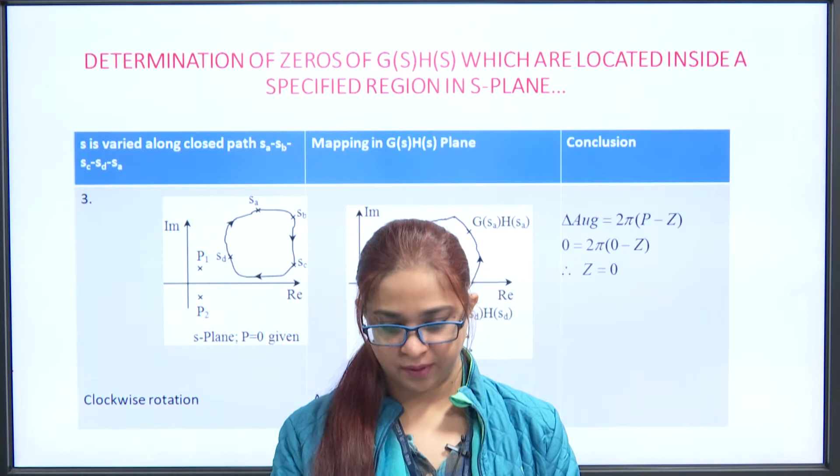Today we will continue this lecture in continuation with the previous lecture where we studied about Nyquist stability criteria. So let's begin with this today's lecture. But before beginning, let me recapitulate what we did in the previous lecture. We were talking about what Nyquist stability criteria says and how we are going to analyze stability and how we can determine other things like frequency response parameters in this frequency domain using this Nyquist criteria.

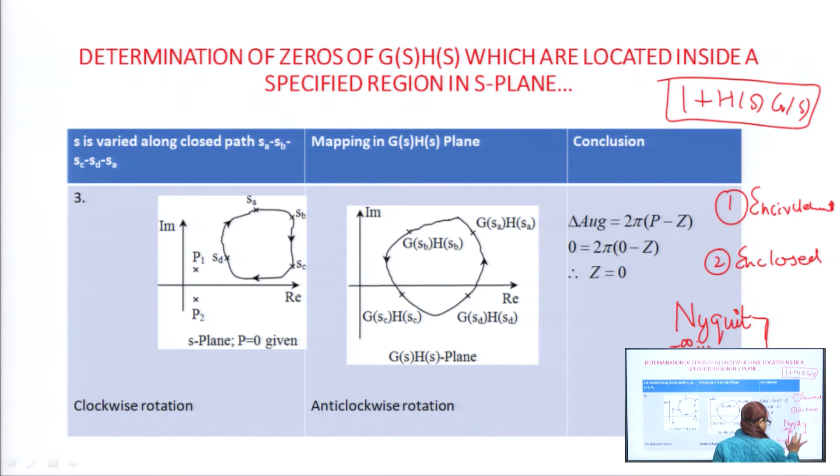This Nyquist curve says that we have one segment which is varying from minus infinity to plus infinity in j omega axis, and then we are taking a semicircle of radius r in the format r e to the power j theta, where r is tending to infinity. So this is our Nyquist contour.

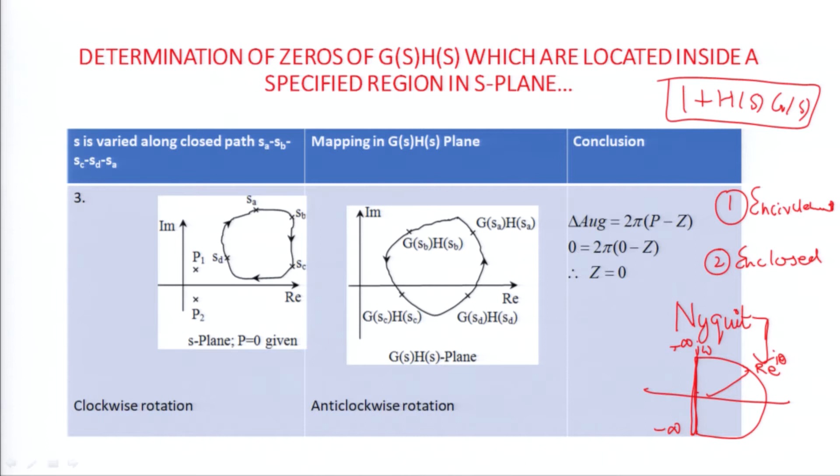Now what are we basically doing with this shape? We have two segments in this shape. First segment is this one which is the entire j omega axis. And the second part of the graph - what is it doing? It is enclosing the entire right half of S plane.

So here we discussed that there is a thing called theory of mapping, where we map a point in one plane to a point in another plane. So basically what we do here is first we map the curve of HSGS. How do we map it? Just like we learned in polar plot - let me remind you how we do it. We substitute S is equal to j omega, right?

We determine the values of magnitude as well as angle at omega equal to 0, at omega equal to infinity, at the intercept which it is making with the help of the real axis, and the intercept which it is making on the imaginary axis. With these 4 points when we join together, we used to get the polar plot. With the help of these 4 points we used to draw the polar plot. Nyquist is nothing but an extension of polar plot.

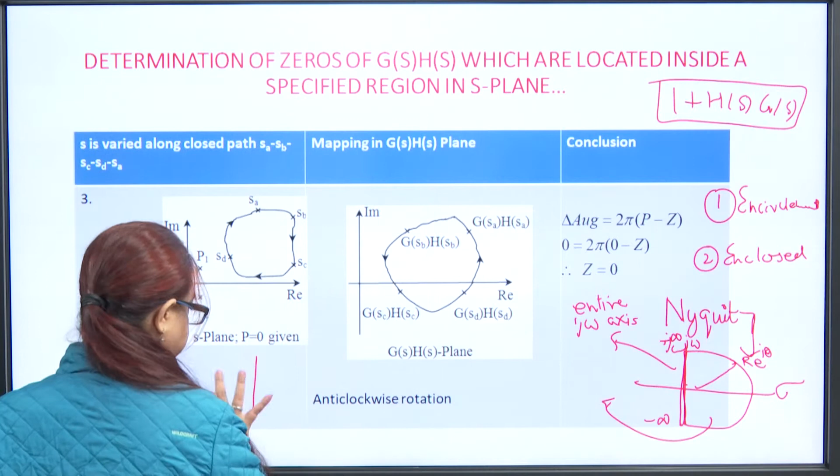So once we have drawn a graph on the S plane which is real and imaginary axis - see, this is real axis and imaginary axis, we are drawing it on real and imaginary axis - now what do we do? We transfer this into another graph with another plane. So let us suppose it is U and JV. And how do we get this U and JV? So what do we do actually?

In this characteristic equation, the term H(S)G(S), basically what we do is substitute S equal to any point S1, and then after substituting, we determine the corresponding value of point in the other plane. Suppose we have a system which is S plus 2.

Now what do we do? We substitute S with any arbitrary complex number, let's say 3 plus 2j. So it becomes 3 plus 2j plus 2, which becomes 5 plus 2j. So the new point corresponding to S plus 2 in the other plane, where we have 3 plus 2j, is 5 plus 2j. Similarly we plot all these points into another plane.

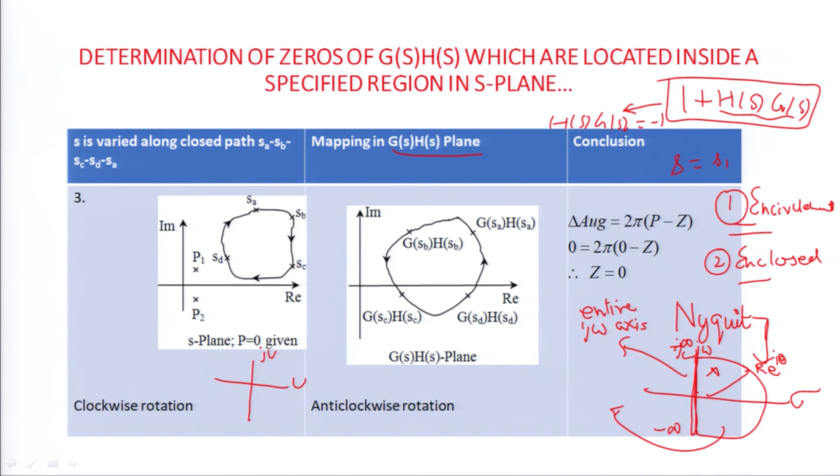the critical point we obtain is H(S)G(S) equal to -1. And for -1 we can write it as -1 plus j0. So rather than checking the encirclement at origin, we check the encirclement at the critical point, which is -1 plus j0, whether it is enclosed or not enclosed.

If it is enclosed, whether the enclosement is in counterclockwise direction or clockwise direction, and the number of encirclements, whether it is being encircled once, twice, or not encircled at all — these are the things we focus on.

Now let us suppose there is a zero of the system located inside this plane, that means it is enclosed in the curve. So what is the curve we get, how do we plot it in both the planes, and what is the conclusion drawn hence? Let's see.

When a pole is being encircled, we have already discussed this in the previous lecture. When nothing is encircled, neither pole nor zero, that case we have also discussed. So let's finally discuss the case when a zero is encircled in it. So basically what happens is

we have a system function where S is varying in a closed path as shown in figure number 3. We have certain specific marked points in this curve, indicated by SA, SB, SC, SD. In this system, all our poles are lying outside this curve. In this example, there are two poles P1 and P2, and both are lying outside. Nothing is being encircled or enclosed in this curve.

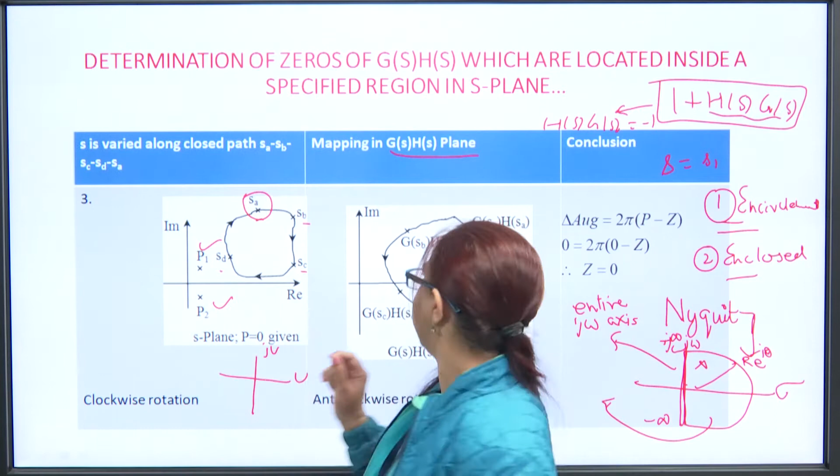When we substituted S equal to SA in the value of H(S)G(S), what do we get? We get a point corresponding to SA in the H(S)G(S) plane, which let's suppose is denoted here.

Similarly, what do we do again? We take the other point SB. See, this curve is having a direction of clockwise rotation, and it is true that it will be clockwise rotation only. Why? We have seen that in the previous lecture.

What about this SB? If we substitute this SB in S here, we will again get a point corresponding to this SB in the HSGS plane. Let's suppose it is G of SB into H of SB. Please pay attention: here we are moving clockwise. When we are moving from SA towards SB in clockwise direction, in the mapping of this function in the HSGS plane, we see that when we are moving from SA to SB, we are moving in the anti-clockwise direction.

This will automatically come. We don't have to put extra effort to determine it; it will always automatically come out this way only. Now the third thing is SC.

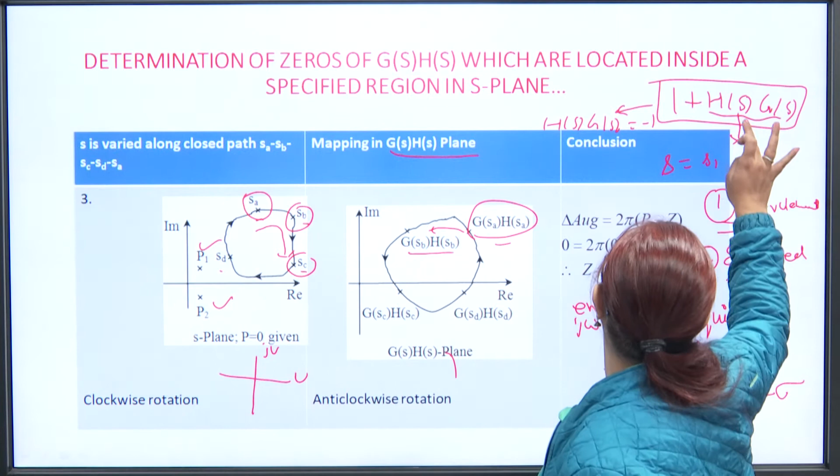Let us map this third point too, to see whether the entire structure gives us anti-clockwise corresponding to clockwise. When we substitute this point SC in the function, from S is equal to SC, we will get a point corresponding to SC in the HSGS plane. Let us mark it as G of SC into H of SC. Again see, the pattern continues.

From SB to SC we are moving in clockwise direction, so in the corresponding HSGS plane, when we move from SB to SC, it is anti-clockwise direction. As we move in clockwise direction towards points in the main S plane, in the HSGS plane the sequence of points moves oppositely. So if the S plane takes clockwise movement, the HSGS plane takes anti-clockwise movement. The opposite of this happens in the encirclement of poles. This is encirclement of zero we are talking about.

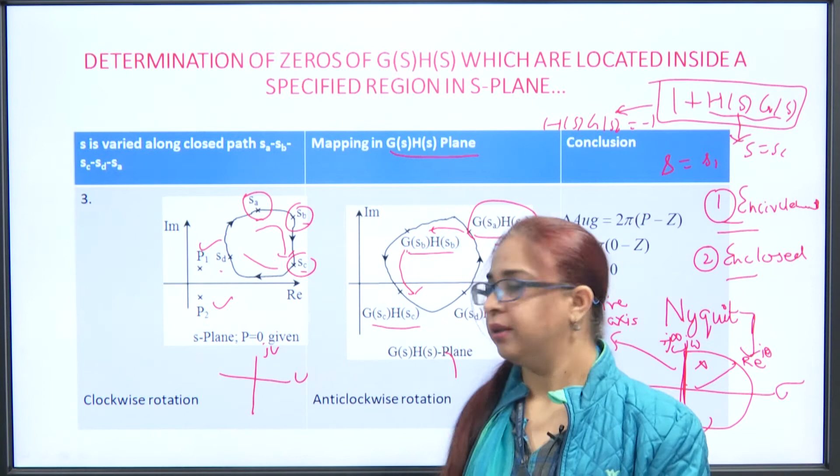Now let's move on to the last referred point, which we have marked as SD. Again we will substitute this value of SD in HSGS, and we will get a corresponding point. This is the corresponding point. See what is happening: it is taking a direction counterclockwise.

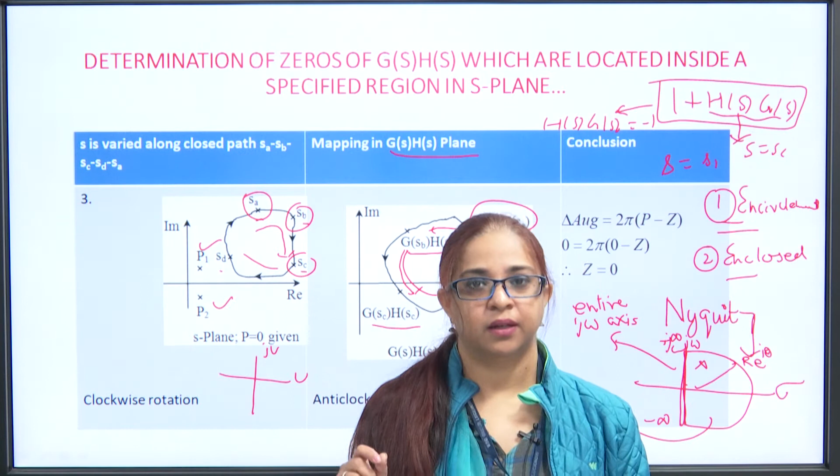Now we know that for a pole or a zero, we get a phase shift of 2 pi when it is enclosed, either in clockwise direction or anti-clockwise direction. If there is more than one encirclement, then the phase shift is 2 pi times P minus Z. This is what Cauchy's principle of argument theory has told us. That is why here it is 2 pi P minus Z.

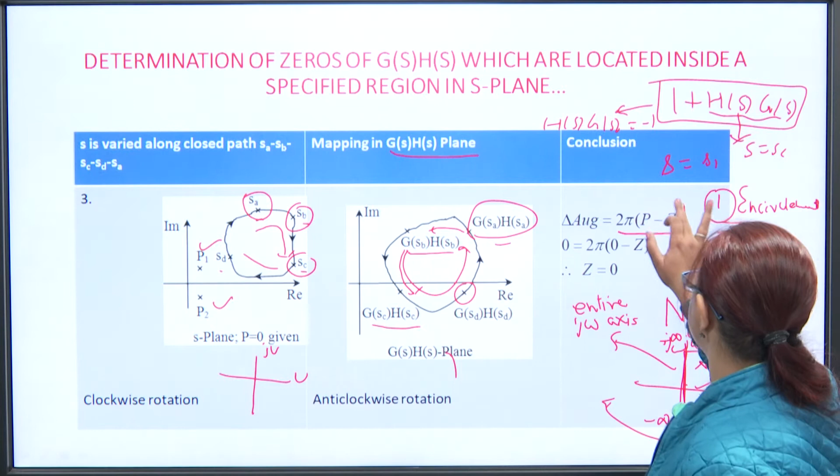According to the number of encirclements, we can also determine how many zeros or how many poles additionally are inside, which is encircled by the main plot. This is what the entire concept is all about.

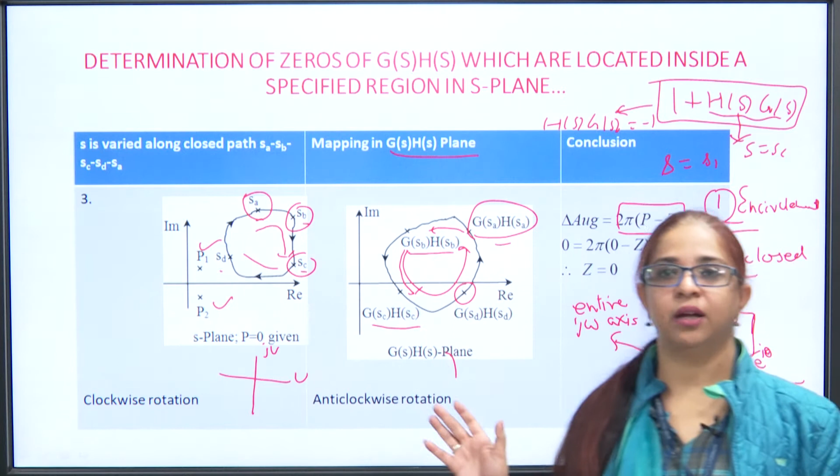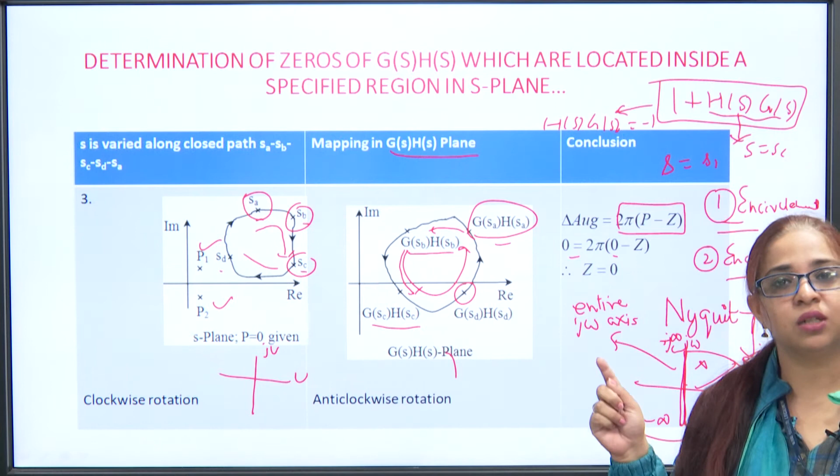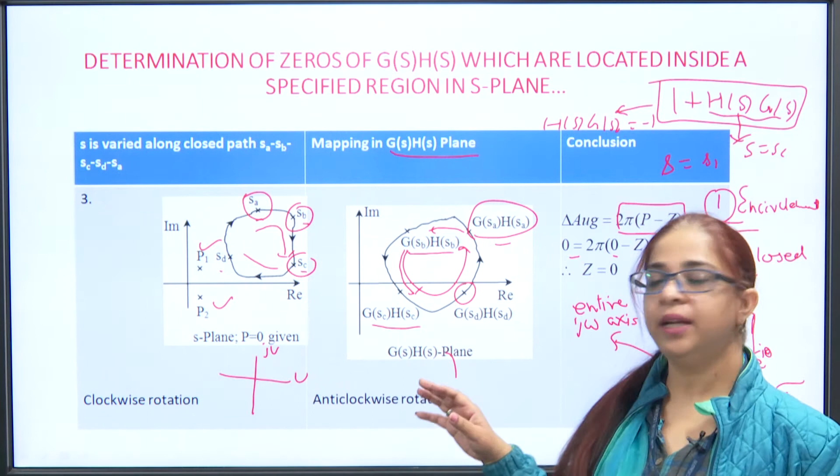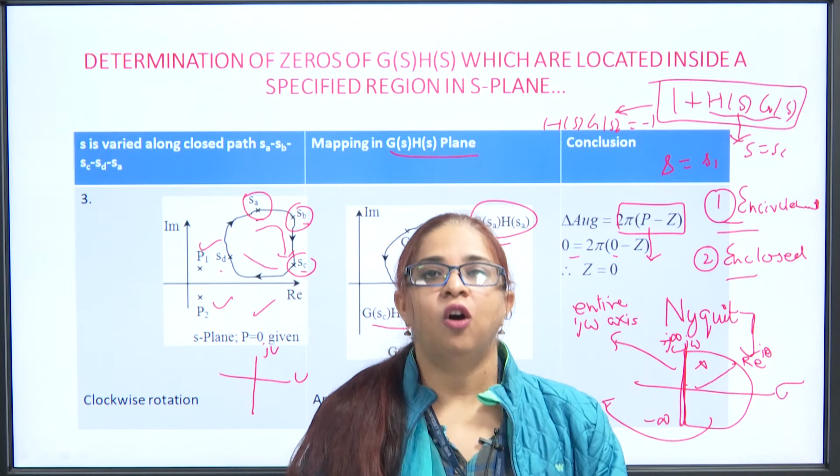If we get this as 0, and as we have already discussed, P and Z are those poles and zeros which are encircled, right? Those poles and those zeros which are encircled in the right half side. If there is no pole on the right half side that is encircled, because here both poles are visible outside, that is why we made this as 0, then we will get the value of Z. This is how the effect of a zero located inside the region of the S plane is determined.

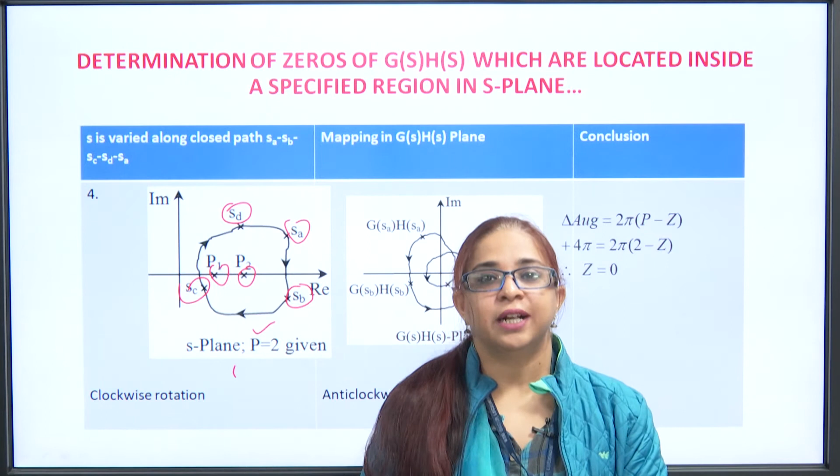So what we have to do is map all these points correspondingly in the G(s)H(s) plane, by the principle of argument theory or theory of mapping as we call it. We know the characteristic equation is 1 plus G(s)H(s).

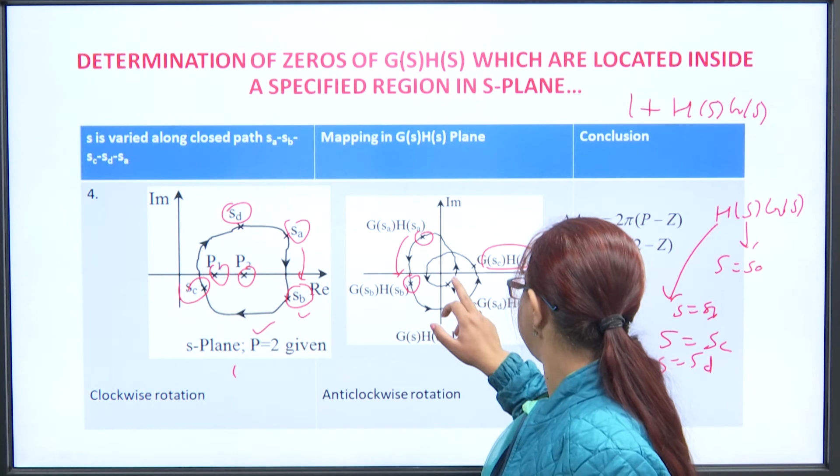The fourth point, what is it? SD. Let's substitute S is equal to SD, again we get another complex number, let's mark that too. Suppose it is here, this point is g(SD) into h(SD).

Now when we start closing it, connecting it, it becomes a closed contour. See here, this is our origin, this point, this center one.

See about the encirclement in this plane. So we can calculate the number of encirclements. How do we calculate it, which we've already discussed? We draw a phasor line to any point outside the contour, and the number of times it intersects the curve is the number of encirclements. We have obtained that, and we can see the encirclement here.

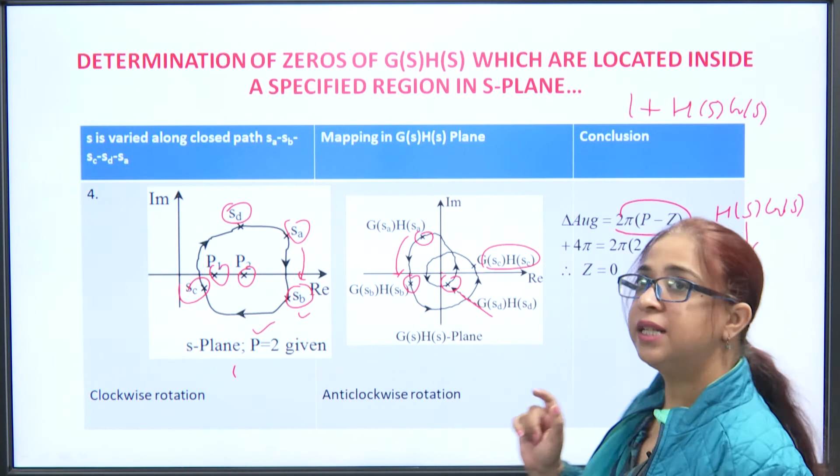Now when we correlate it with the principle of argument theory, what do we get? It is a shift of 2 pi times (p minus z). This is what the theory says about encirclement in Cauchy's principle. So it is 2 pi (p minus z), where p is the number of poles enclosed inside that curve.

See here, there are 2 poles inside that curve, so p is 2. Z is what we have to determine. This 2 poles, every pole gets a shift of plus 2 pi, so it becomes 4 pi, and when we solve, we get z is equal to 0. That means no zeros are enclosed in that specific region.

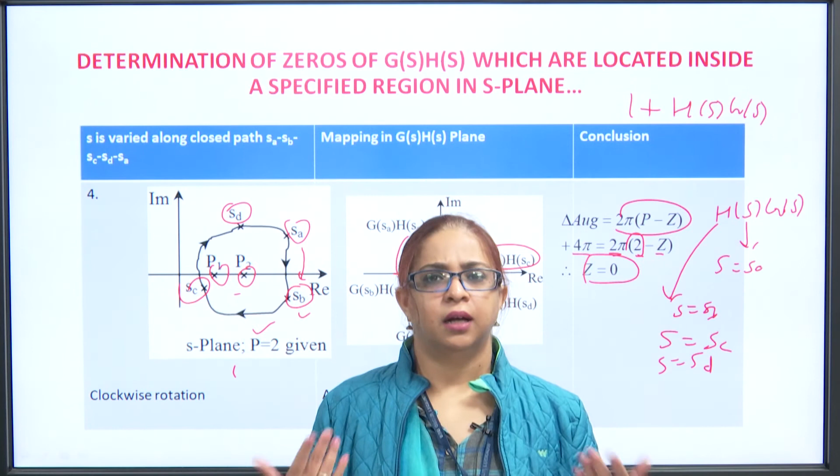This is how we determine the location of zeros, or if you want, poles. We are much interested in zeros because the zeros of the characteristic equation are the poles of our original system, and we need to focus more on their location, hence we obtain the values correspondingly.

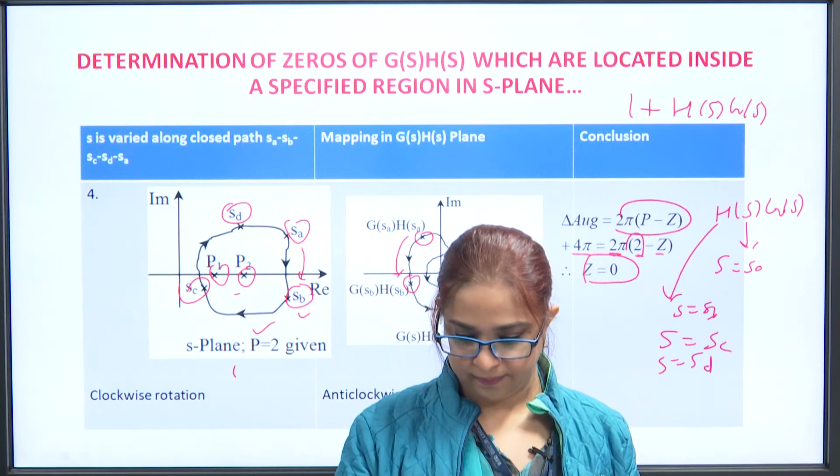Now let's quickly move on to how we close the Nyquist plot. That means the journey of obtaining the Nyquist plot from the polar plot. So what do we basically do in the Nyquist plot?

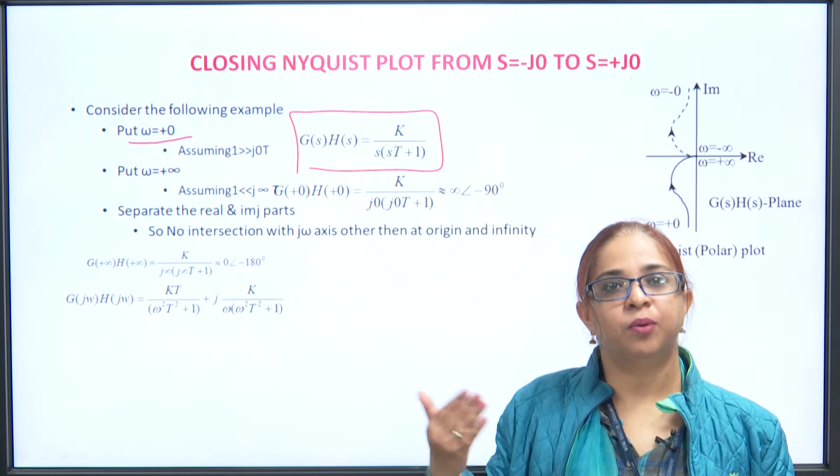We determine 4 points. What were they? The point where omega is equal to 0, we calculate the value of magnitude and angle, that is what is written here, put omega equal to 0. For any function, let's assume the system function is k upon s into 1 plus sT. We have already done this type of question in polar plots, but here we are just showing the changes we have to make when moving from polar plot to Nyquist, which is called closing the Nyquist plot.

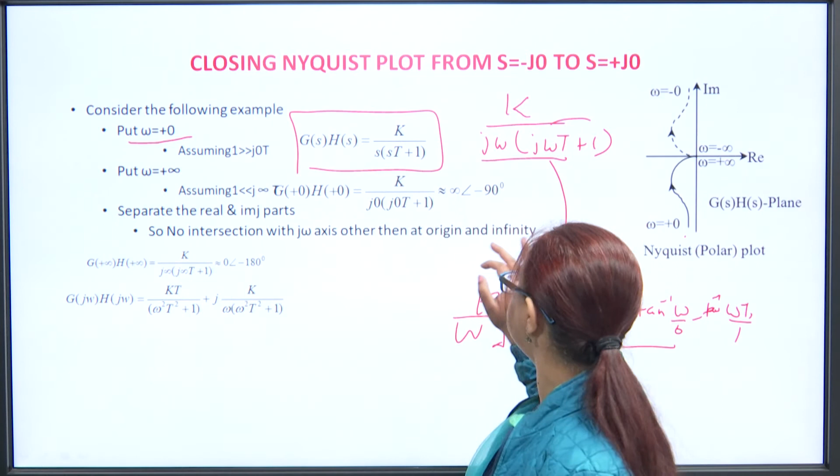So this point is midway when we are talking about 0 to infinity. What we get when we are substituting infinity, we will get the values of magnitude as well as angle. We plot it. Again we determine the values of intersection with real axis and with imaginary axis, which comes out to be origin only and infinity. How do we do that?

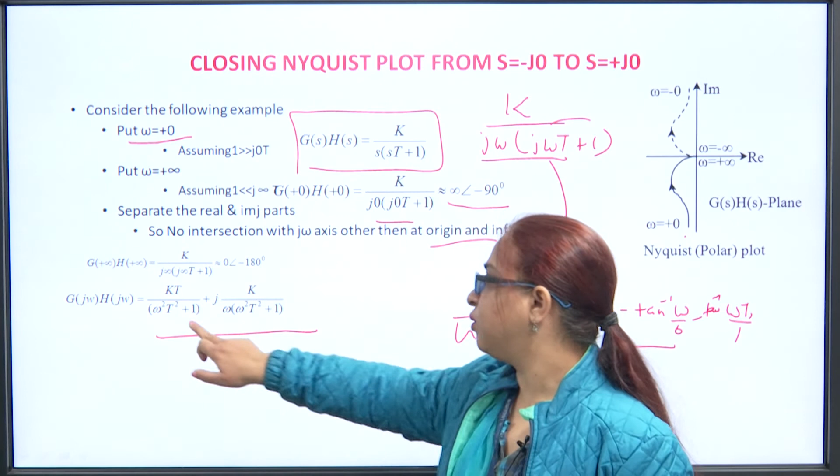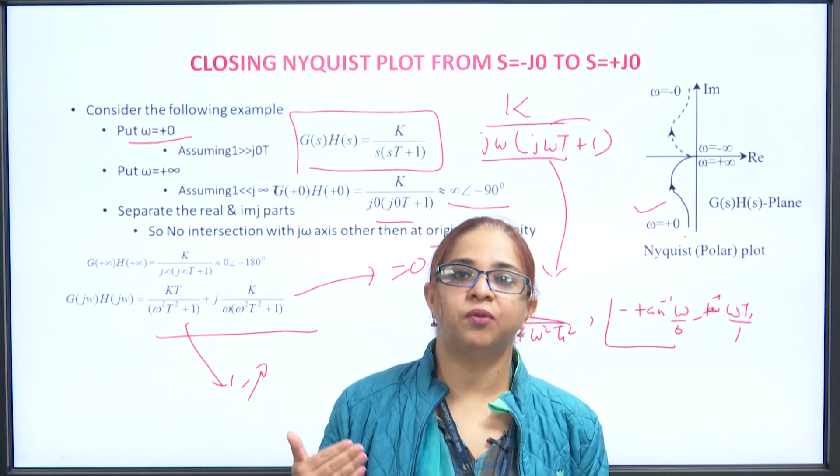By rationalizing, substituting one time real part to 0, the other time imaginary part to 0, and get the corresponding intercepts. As soon as we get the polar plot intercepts, what do we do? Since this figure is symmetric about real axis for the entire domain from 0 to infinity, we have the graph. If we have to do it from minus infinity to plus infinity, what do we simply do? We simply take a mirror image, and that is how we go from polar plot to Nyquist plot.

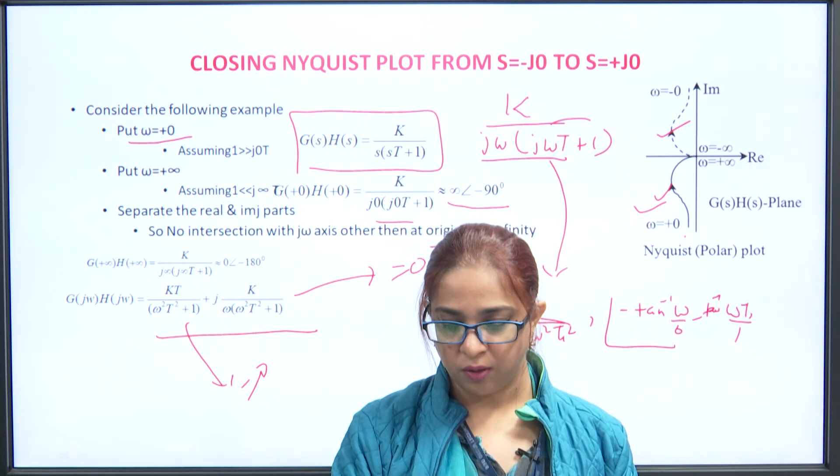See, one more example is shown here. In this case, this is the same thing where we have obtained that point from 0 to infinity. Now we have left out - we have talked about singular points, correct?

So whenever our type 1 plot moves from 0 to much closer to the origin, what happens? An angle of minus pi, which is minus indicating clockwise, have an infinite radius. That is what we have discussed about the Nyquist contour.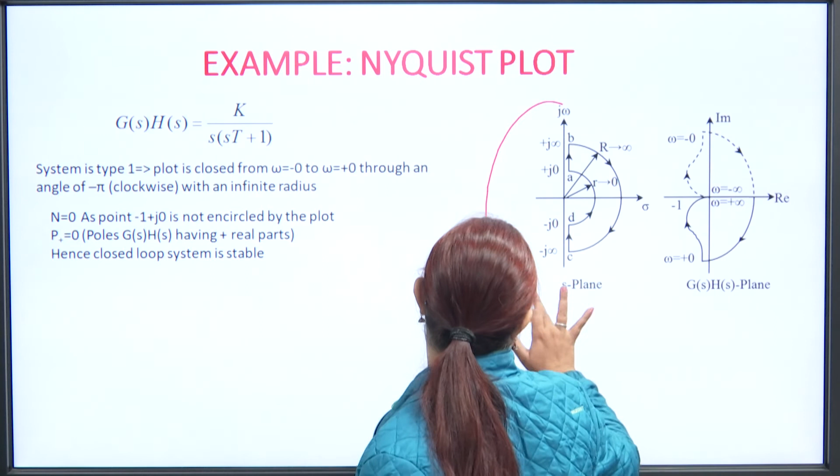So this is the depiction of Nyquist contour here in S plane, and when we are corresponding it, converting it into GH(s) plane by theory of mapping, we get the encirclement here or the enclosed path. Since no point lies on the right half side, N is equal to 0, since the minus 1 point is not getting encircled. See here, this is here and it is not getting encircled by the curve. That means there are no poles and no zeros which are lying on the right half side of the S plane. That means this is an example of a stable system.

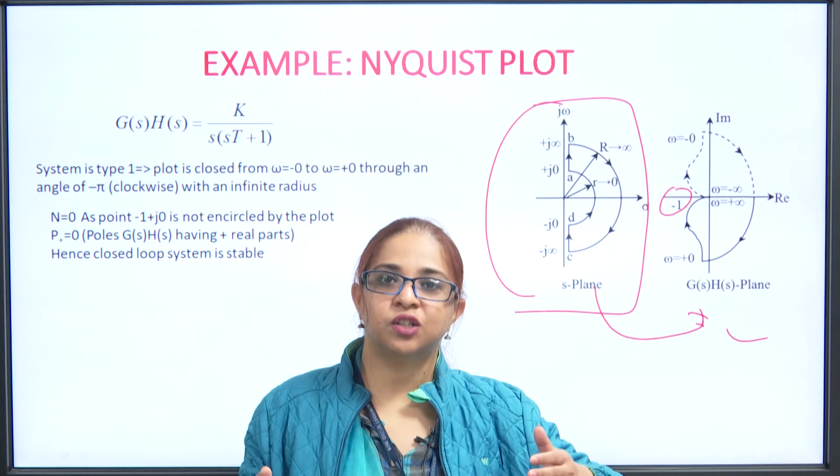And that is why, whenever we are removing singular points, we have to modulate some portions of the Nyquist contour which were covering the entire j omega axis. It is again covering the entire j omega axis but leaving out those singular points, and hence we get this figure. This has also been discussed in one of the previous lectures.

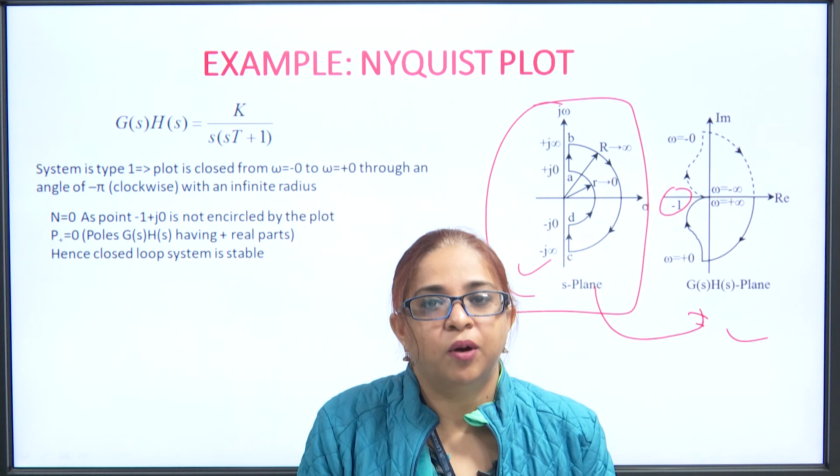And hence we get the stability defined by the closed loop system by visualizing the number of encirclements of the critical point, which was minus 1 plus j0. If it is not encircled, that means the system is stable. Since in this figure it is not encircled, it is seen here, it is a stable system.

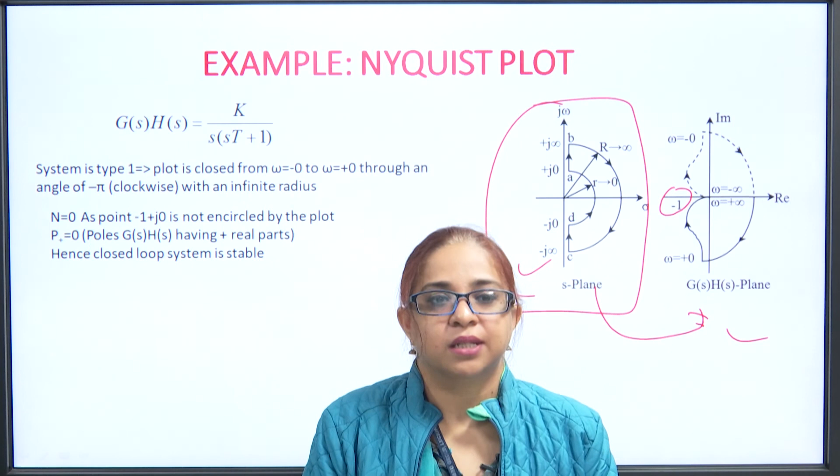See here again one example which is shown, it is a type 2 system, and see, when we again plot this, we get the number of encirclements as 2 here. See here, in this case, this particular question, you can try it by yourself.

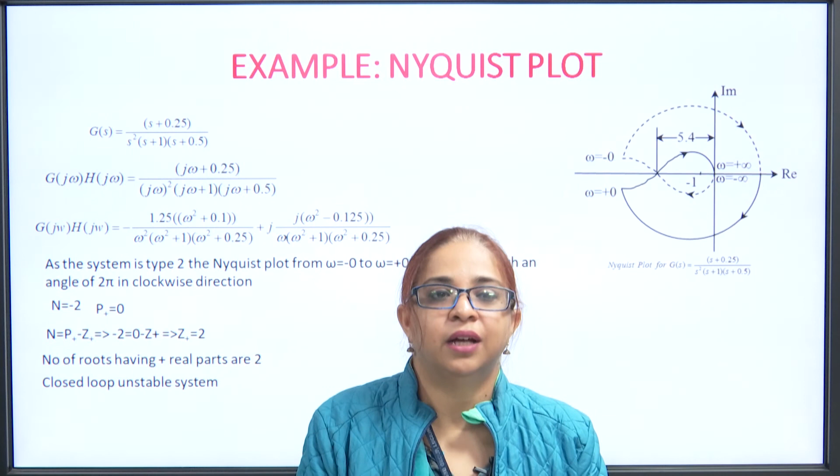What we have to simply do: draw the polar plot, make a mirror image of that polar plot, and what about the encirclement? We have to check whether minus 1 is being encircled or not, that will give us the stability, and when any pole or zero is lying on the right half side, it has to be encircled in the Nyquist contour. That is it. Thank you.